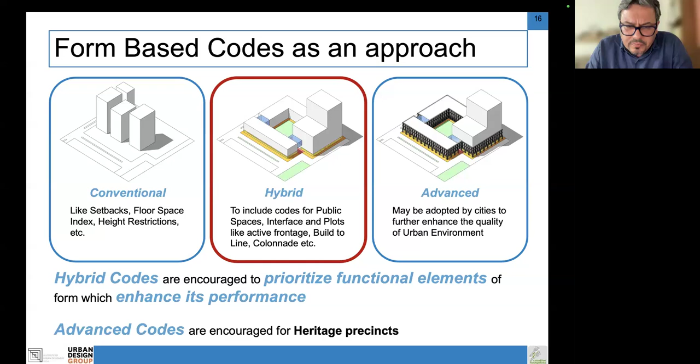And the last one is where the Indian regulations don't really encourage the last one. But if, say, for example, there are heritage precincts or precincts which already have a pre-decided form or designed form, they're open for adoption of this. Say, for example, cities like Srinagar, the historic parts of Kolkata, historic parts of Lucknow, these areas where there is a certain architectural quality which already exists or is being preserved, there the last one comes into play. So we'll be talking about the second one, which is the hybrid type of form-based codes.

Now, if you look at the first type of form-based codes, you get the left-hand side kind of urban development, where the city regulates the quantum. So if you have a plot, the spaces outside the plot are mostly public spaces. Within the plot, you are given certain norms to develop a building, and the norms are as simple as setbacks, how much covered ground you can occupy, and how much built-up space you can create.

In this set of regulations, the interface of the plot with the public space is completely lost and open for interpretation by the architect who designs the plot itself. As a result, the city doesn't get the kind of intended form. All master plans had some kind of form thought of. Now, as a result, the first type only governs the quantum. The second type, which is the hybrid type, also talks about public spaces and interfaces, and it brings it to the forefront of the regulatory discussion.

Say, for example, if there's a plot which is getting developed, the plot owner would be aware that there is a footpath in front of it, there is a crossing, there is a green area, a public space. All of those parameters he would be aware of at the time of design of the plot, and the plot owner would have a responsibility of designing the plot interface to meet some of the requirements of making the public space more active and usable. Say, for example, introducing an active frontage on some site, introducing colonnades, giving a passage through the plot. These kinds of parameters are encouraged in this second approach.

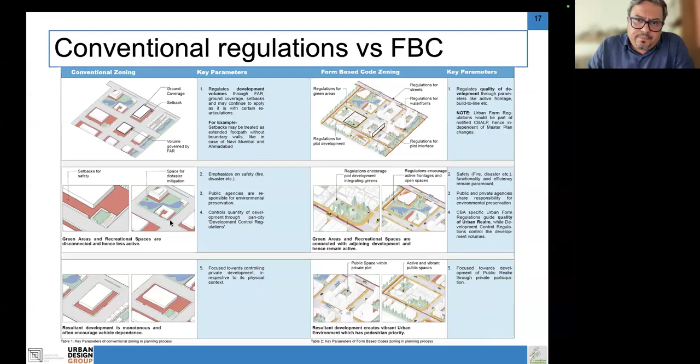This is not new for India. This has been there for ages. And I'll show you examples from India where we've been able to capture all these parameters of the form from various parts of the country. So I'll just very quickly touch upon some of the cities. So if you look at Leh, it is basically a cold desert, and most of the traditional development in Leh was in response to the climatic condition. And as a result, you have a certain definition of form.

Vrindavan, again a traditional town, had a certain response to the culture of the place. As a result, it has a specific kind of form. Gift City, mostly new, was a response to the financial capital requirement of the city and the region. As a result, it has a certain definition of the form. Gift City is the only one where form-based codes have been used formally. All the others are mostly in response to either culture, climate, or other local requirements. I'll be discussing Gangtok, Chennai, and Pune, sharing some of the learnings from there in the later part, but the first three we haven't touched upon in this particular example.

We also looked into the master plans and bylaws. We compared the master plan with certain requirements of form, and we saw that some of the parameters of the form are present in the master plans. Some of them require rearticulation and some of them are absent. We also compared it with the URDPFI. The URDPFI guidelines are essentially the Urban and Regional Development Plan Formulation and Implementation guidelines. I'm sorry if I'm wrong with the full form. But essentially, this is kind of a Bible for any kind of planning exercise in India. All cities follow the URDPFI guidelines to formulate their master plans and development regulations.

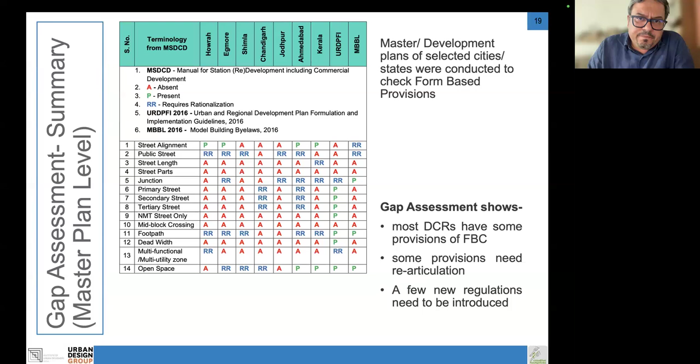So building bylaws also, there are examples across these cities where we've seen that some of the parameters exist, some of them need rearticulation, and some of them are completely absent. I'll show these later on as well.

Now I'll come to some of the cities, and the reason why I'm showing you through this visual form is because, in a lot of cases, when we have this discussion on form-based codes, the first reaction from anyone is that this is illegal or this cannot happen in India, because the conventional mindset is to look at the first kind of conventional form-based code. So if it's legally allowed, then it's possible. If it's legally not allowed, it's not possible.

But when we go to the cities, when we look at some parts of the cities, we realize that people have shown the demand for certain kinds of regulation. And whatever I'll show you now is from the studies of the city. Formally, a lot of this is considered illegal in the building bylaws, and we don't know why. That's the most surprising part. But if we look at its application and if we look at its needs, then you will see that yes, there's no reason to make it illegal.

This is an example of Guwahati in Assam. This is Pan Bazaar area of Guwahati, and a lot of commercial establishments over there have converted their front setback into public spaces. You may have some parking, etc., but essentially the front setback is used as a public space. And this is a practice in a lot of other cities as well. So Kolkata, another eastern city, also uses the front setback as a public space.

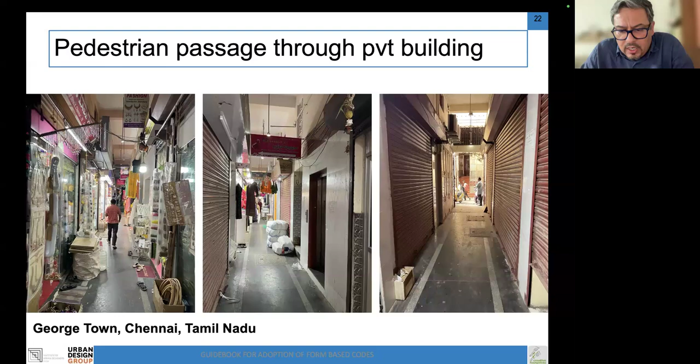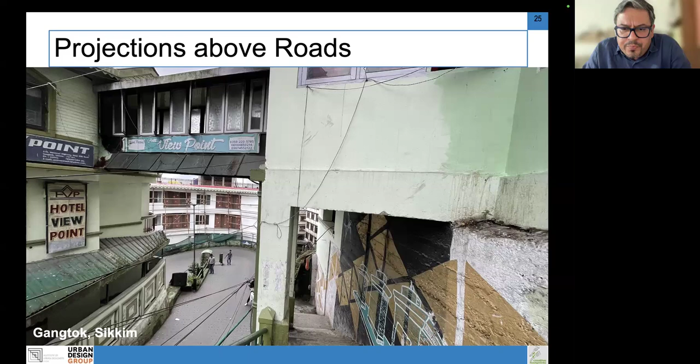Something that most of the building bylaws in our country absolutely restrict is connection across road right of ways. And a lot of our traditional cities, a lot of our contemporary cities, especially in areas which are hilly, their connections across road right of ways actually are very good, and they enhance the efficiency of the form. So the new building bylaws in a lot of cities have started allowing this, provided that they meet fire requirements and other safety requirements. And this is now becoming one of the most important changes in the bylaws.

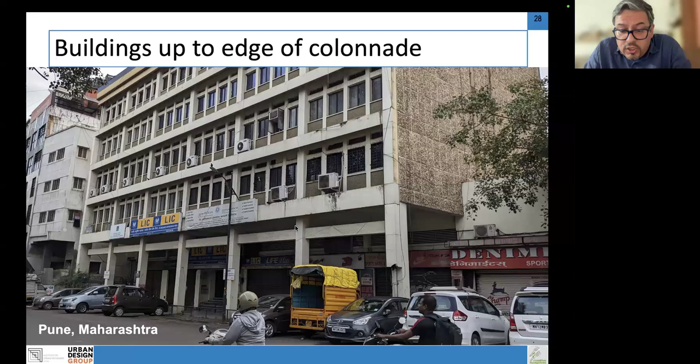In Pune, we have these kind of blocks where you have footpaths through the colonnades and you have the development on top of it. So the footpath is actually a part of the private space. Most building bylaws in India right now don't talk about colonnades. And considering the kind of climatic condition we are in, India needs a lot of shaded footpaths. So this actually is one of the most important elements of form that we've somehow missed.

Pune also has a lot of perimeter blocks and perimeter blocks with active frontages. Now, this discussion of perimeter block with active frontage is actually quite relevant in the context of transit-oriented development, because a lot of cities are implementing transit-oriented development, and within the regulations they are encouraging active frontage. And then there is a parallel discussion: how do we have access to parking for these areas? So Pune and Indore have also shown us examples that if you have perimeter blocks, you can have access to the parking from the block and you can have the parking just behind it.

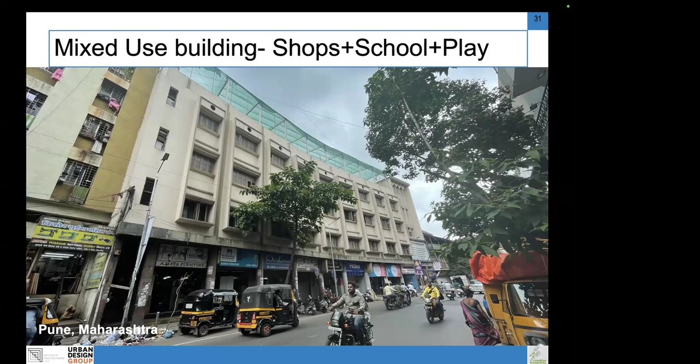Mix of use. There's a lot of concern with regards to mix of use. Again, this is something that encourages a certain quality of form. Mix of use: this is an example of Pune, where we have shops on the ground floor. We have a school right on top of it. On the left-hand side, we have a residential block. And on top of the school, you have the play area of the school.

So these kinds of mixes have been experimented with in our older parts, and they function really well, because for someone who has a house in the residential building next to it, it's very easy to send the child to the school right next to the house. So these kinds of mixes also add value to the kind of form that we are discussing.

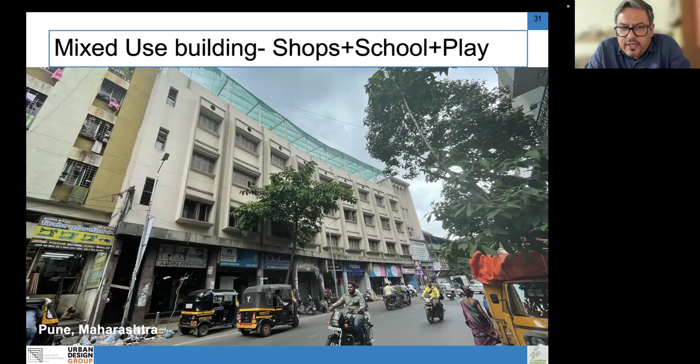Pune has also shown very good examples of how to treat the corners. So most of their corners are either rounded corners or chamfered corners. They have very high commercial value, and as a result, they generally don't build boundary walls at the corners. So this may be an outlet of a restaurant, an outlet for a bank. So these kinds of variations are very actively visible over there.

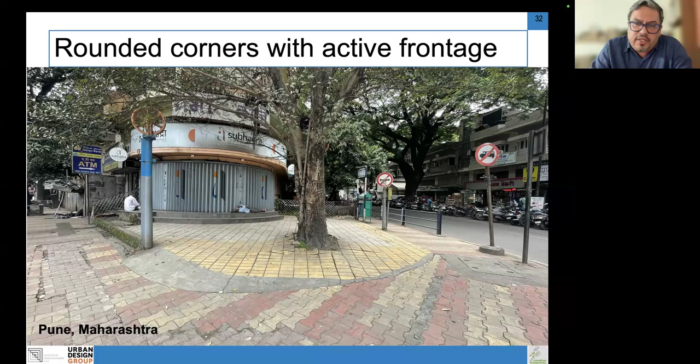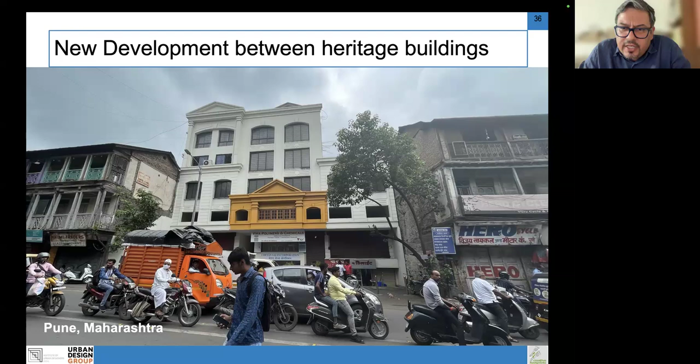With regards to heritage, again, Pune has shown a very good example of defining heritage, defining what to do with the heritage, how much to retain, what can be allowed to change, etc. So these things actually add a lot of value to the kind of urban form that we are looking at. Pune also has cases where new developments have started coming in next to the older historic development. There are also cases, again in Pune, so you have a lot of types of examples from Pune, where adaptive reuse has also been done. Most building bylaws are silent about response to historic areas, response to heritage. So now there's a lot of discussion on how we institutionalize all of this.

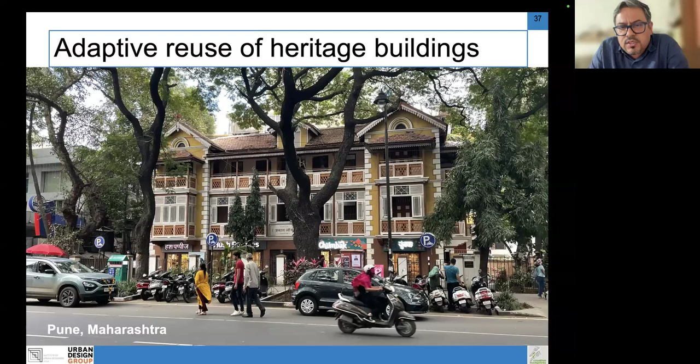So while this was the background of what we did, how we study the parameters of form, we got a chance to work first with Indian Railways and then with the National Institute of Urban Affairs to structure a set of tools and parameters for cities to adopt form-based codes. And it was essentially a set of guidelines and manuals. The cities could then use it to learn and make their own sets of regulations. Because like I showed you, there's no unique way of identifying the parameters of form. Every city may bring in new parameters and unique parameters for the city itself.

So the broader approach was very straightforward. The area-based planning of certain areas have to be very robust. The city, while it can have unified bylaws, it should also have contextual area-based regulations. Because the cities were working on local area plans, it was easier for them to integrate it. Then all of this would start giving a sense of urban design and urban vision for the city, which can then be broken down into various parameters of form, the urban form regulations, and I'll show you these.

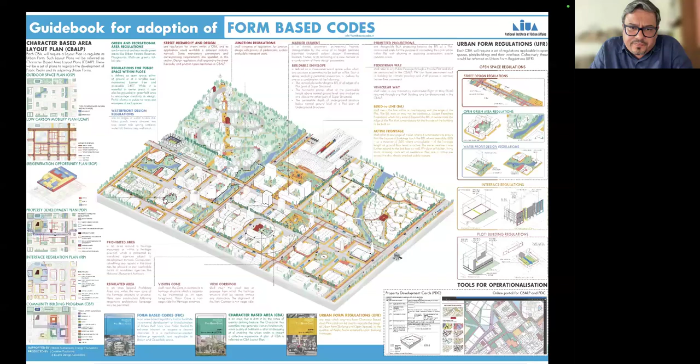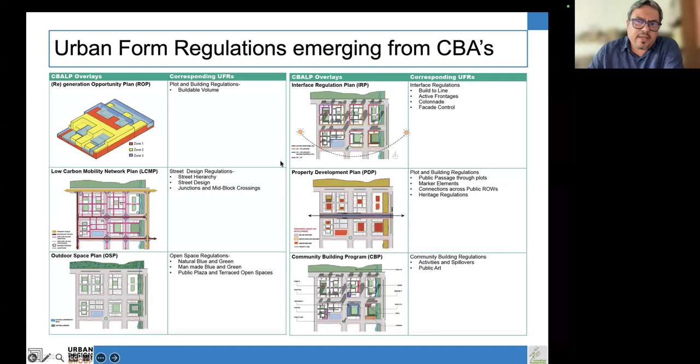Say, for example, if we look at the local area plan, the local area plan already is capturing a lot of information. The only parameters which are missing in the local area plans are related with how do we articulate form and how do we read the form. So if those parameters are added to these overlays, then it becomes easier for city to adopt this. We've done this kind of work for UP. Something similar with regards to this is also happening in Delhi. So cities are taking their own time to figure out how do they want to adopt this. These kind of overlays and the local area plans then give genesis to the form regulations.

And while all of this is shown in simplified graphic, each component that you see highlighted is one parameter of the form. Say, for example, how do you define a junction? How do you define a mid-block crossing? How do you define street layouts? When we talk about green areas, which ones are natural greens, which are man-made greens, what all can be allowed in the man-made greens, what all can be allowed in natural greens. And the idea is to bring all this in the forefront of urban regulations and urban development, rather than keeping it at the backdrop. Then if there's a plot which abuts the waterfront, then what are the regulations for those?

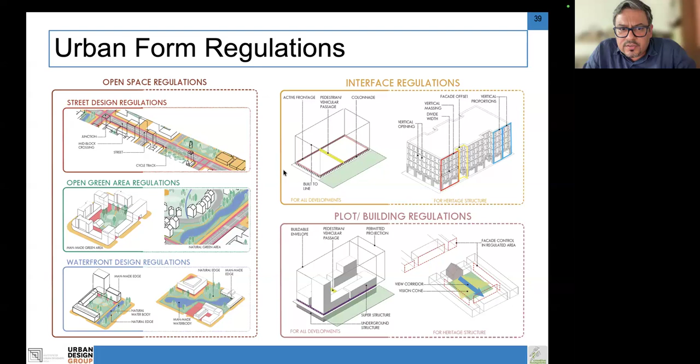Interface, I explained earlier, active frontages, vehicular passages, colonnades, built to line. A lot of these are now being adopted. Other kinds of regulations which are emerging from your heritage regulations are also integrated. So view corridors, vision cones, facade controls, all of these start coming in. Now, to operationalize all of this, we've not reached this stage in the urban development sector. We are still here, where cities have started experimenting and exploring and adding these parameters in the building regulations. Over a period of time, they'll reach a point where then there'll be a demand for how do we make sure that all of this is user friendly and integrated in the building sanctions.

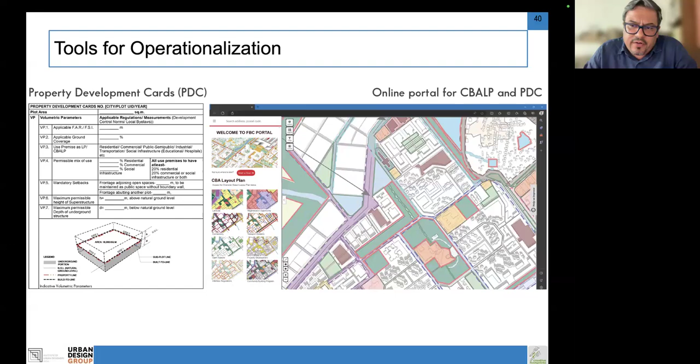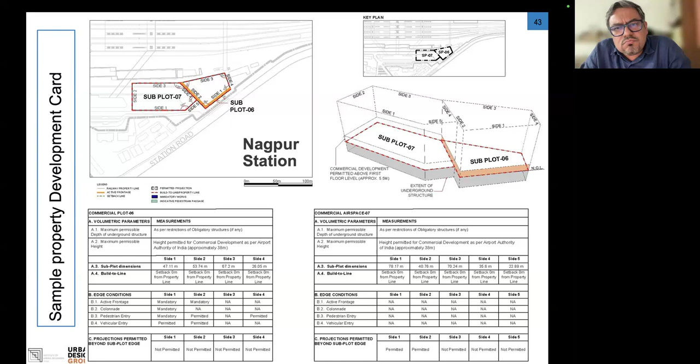So that's where property development cards and interfaces, in India we call them ease of doing business. I don't know why, but most building plan interfaces portals are called ease of doing business portals. So form-based codes can then be integrated with these portals as well. An example of this is how railways used it. So railways actually, this is from how railways started tendering their projects. So they started creating these kind of property development cards. So for each plot, they would have these kind of regulations with regards to the form, and essentially highlighting the most important parts. Say, for example, which is the active frontage, where do they need the passage through the plot, what is the overall volume that can be developed, and that's it. So I stop here, and we can now have questions.